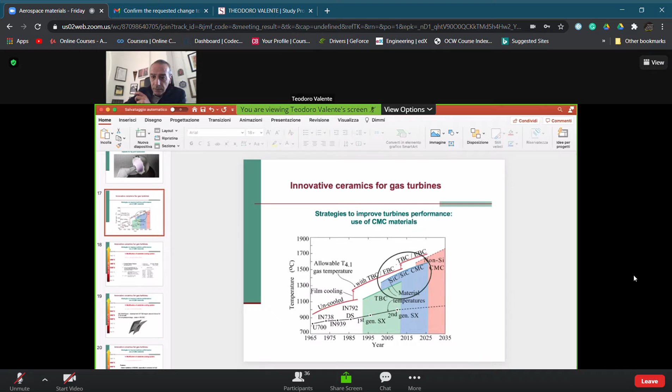Okay, just continuing our discussion related to ceramic materials. This is another field in which ceramic materials, not as bulk materials but as composite materials, can be interesting, and it is the use of this kind of solution in components for gas turbines.

As we will see, this is an area in which there are not yet fully consolidated applications, but it is a developing area, also due to the fact that it is a new area in terms of time. But we can understand the reasons because of these composite materials, especially silicon carbide composite materials, as

I need a pen, one moment. No, oof. Just one moment.

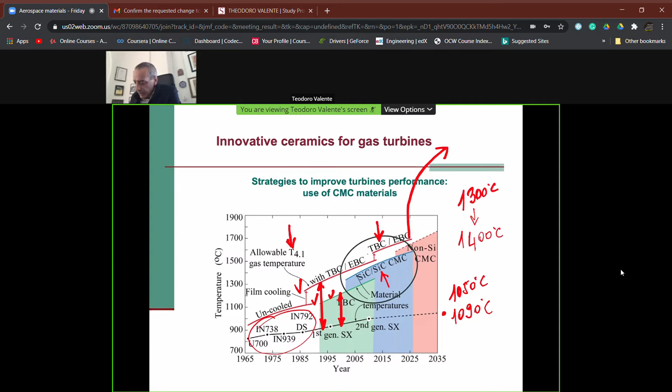But if we move to basic materials like silicon carbide composites, and we also need to put on top, for reasons we will see in a moment, our thermal barrier coatings, you can see here that we can reach a final gas temperature, thus increasing the performance of the engine, of around 1600 Celsius. So with a relevant improvement in terms of fuel efficiency or increased payload, for example, of the aircraft.

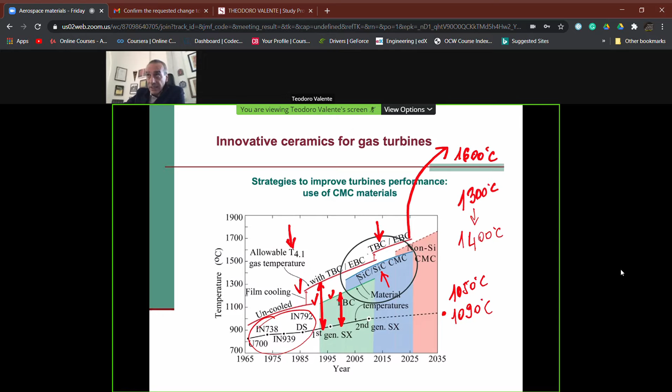This is the reason there is interest in this kind of solutions based on composites, in order to overcome the problem we discussed last time, referred to conventional bulk ceramics, not composite, and related to the low fracture toughness values.

As you can see here, the first relevant patent about this line, which modifies the composition of the blades, so it requires modifying also the substrate coating system, as well as the use of innovative thermal barrier coatings, is quite recent. You see here, less than 10 years. And so the development time for widespread application is at least double this figure. For land-based gas turbines, for example, it is more than 20 years.

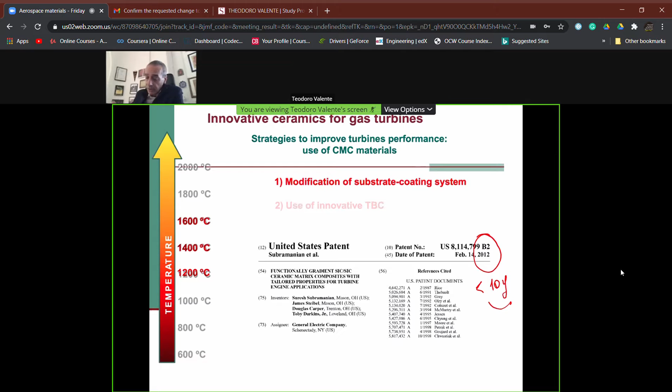Thus, this is a very interesting topic to be monitored, since many relevant industrial companies are working on it, even though, as I said before, we do not yet have widespread application of this potential solution. This is one example, made in the F136 engine from General Electric Rolls-Royce, which is the second choice for this aircraft. You see, that's not a civil aircraft.

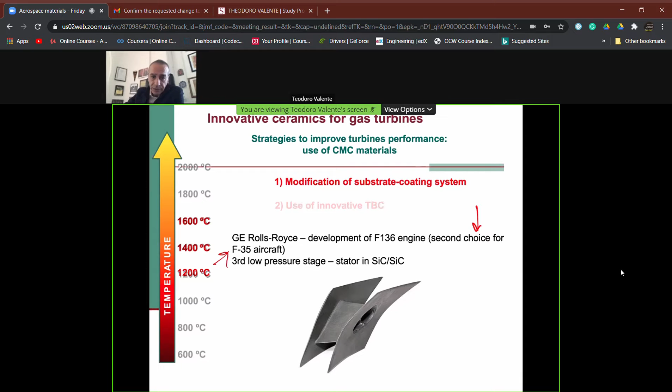And also, we do have examples of silicon carbide composite materials used for the fabrication of stators in the third low pressure stage of the engine itself. So an interesting thing to be monitored in the next years. We still need, even if we go to the solution of silicon carbide ceramic blades, to condition the surface of the blade.

Just to give you an example that we also mentioned, but we can write something now. If we have silicon carbide which is going to react, for example, in a wet environment with oxygen, what can happen is the formation, for example, of silicon oxide, and then carbon oxide or monoxide, that depends, COx. This silicon oxide in this form, with 2 atoms of oxygen, is a solid material, but

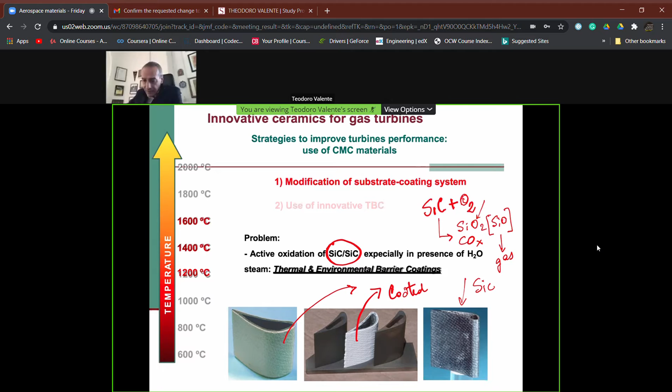This is another topic on which many industries are working, that is the modification of the TBC system. The usual TBC system that we discussed last time, which is the most diffused, is partially stabilized zirconia as a top coat. Then we have an MCrAlY as a bond coat. Then we have, for example, the nickel-based superalloys. So we have the layer of partially stabilized zirconia and the layer, with different thicknesses, of the MCrAlY. Now we are working on the development of multi-layered coatings.

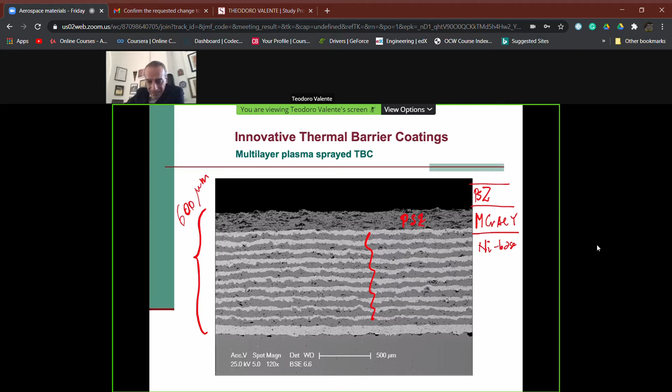This is another topic on which applied, not basic, research and development is going on in these years. Another application of ceramic materials which must be mentioned, and as you see we are discussing very few applications in terms of structural parts, but this is the state of the art today, is the use of a special class of ceramic materials, the so-called UHTC, ultra high temperature ceramics, to fabricate reusable thermal protection systems, TPS. This is the area of re-entry vehicles coming from outside the atmosphere back to the Earth in a cyclic way.

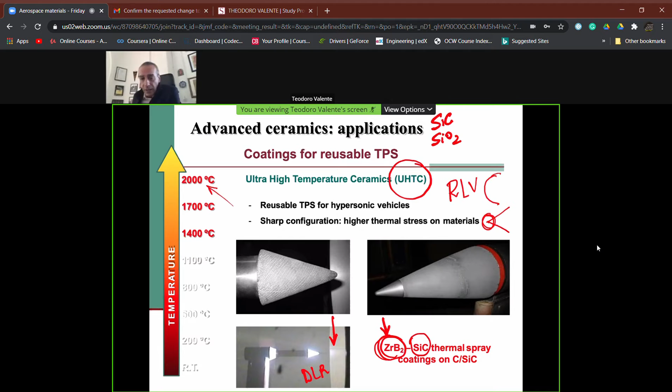And in this case, we have another very targeted niche application of composites, ceramic materials, because you see here we have two phases, the zirconium diboride and the silicon carbide, again in the form of coatings. This is an example of how this coating works.

together with a very relevant thermal shock resistance due to the fact that zirconium diboride, which can be fabricated also by plasma spraying with a tailored porosity, has a very significant thermal conductivity for the ceramic class of materials, and this can reduce stresses related to thermal shock. Also assuring good mechanical properties due to the strengthening mechanism, which can be put in place by using a formulation which recalls the concept of ceramic matrix composites, and then also ablation, which is related with high temperature.

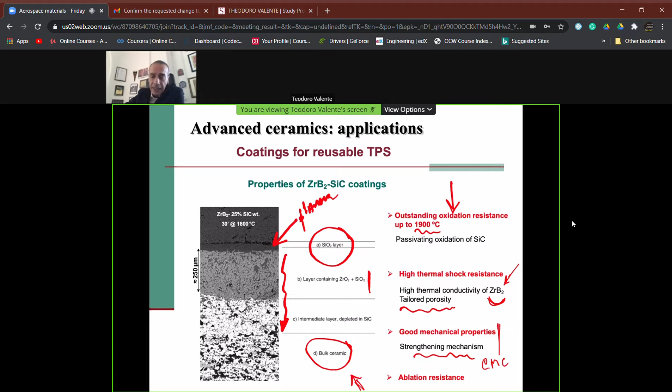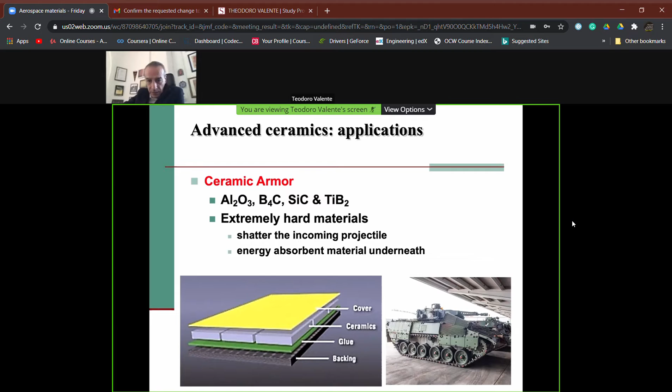We can move also, as another important field not to forget, to the area of thin films, those films which are obtained, for example, with techniques essentially based on physical vapor deposition methods. That is, films in which the thickness of the coating usually does not exceed 5 microns. So this is the reason we call them thin films. And that is the cutting tool. This is a quite established solution.

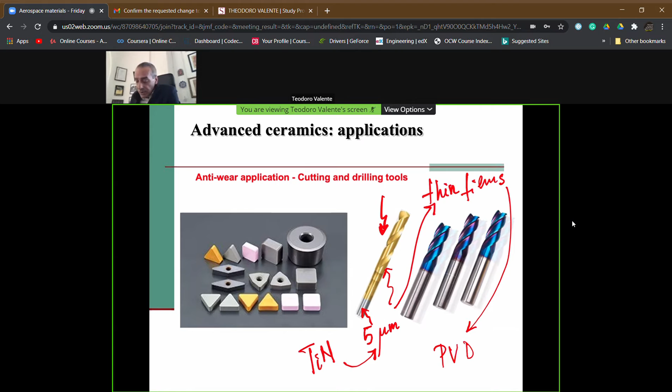thus giving more durability to the object itself during operation when it is going to be used as a cutting or a drilling tool, due to the tribological loads which are applied when used in this way.

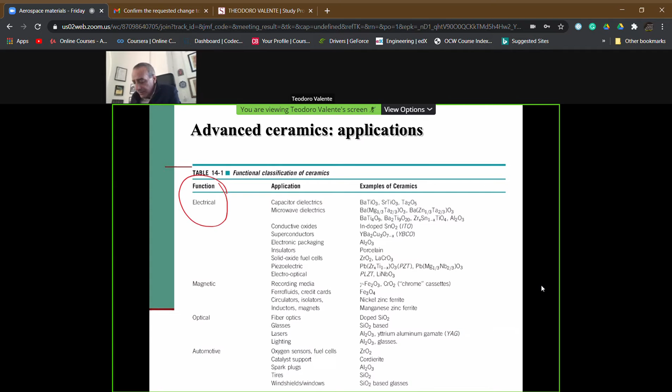Also in this way, many times, not all the times, the functionalization of the surface can be made by coatings, but we have also examples of components made of bulk ceramic when we expect a special function from the component itself.

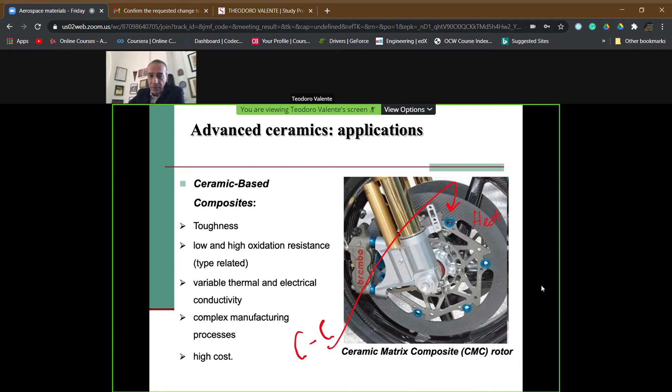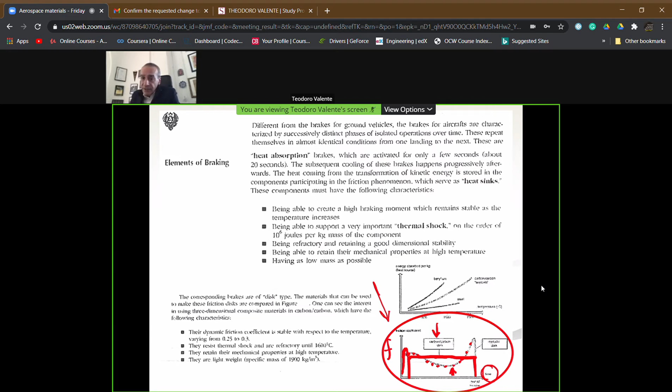It is the first lap which is made, and this is made just to allow the braking system to reach the temperature suitable for a good performance, so that when the Grand Prix starts, the discs are at a good temperature, and can guarantee the efficiency of the braking system itself.

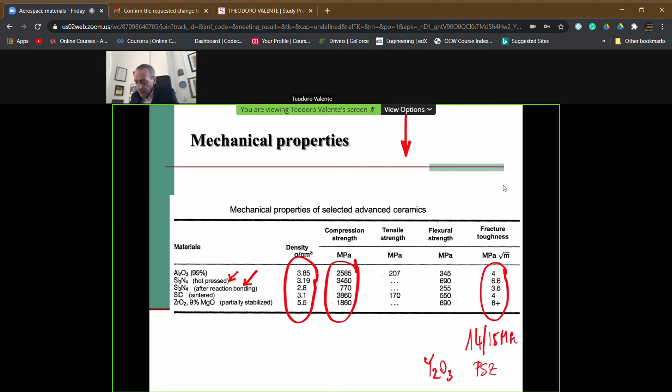We see a very relevant resistance in compression, but a very poor resistance when we have a tensile load. This is one thing that we must remember, and this is related to the low value of the fracture toughness of the materials themselves.

We can also measure the resistance of the ceramic material by using not tensile tests, but bending tests. And this is what is given by the modulus of rupture of the materials, the flexural strength, which gives to us the tensile strength of the materials, but measured by a bending test. And another thing that we see here is that this value, which is again a tensile strength, but measured in bending, is usually higher than that which is measured by a pure tensile stress.

So why all this, and why must we remember this? We must remember this, first of all, for one item. Let me repeat to you again. This class of materials, and now I'm talking about bulk ceramic materials, they do have a very good behavior in compression, but a very poor behavior when subjected to tensile stresses. Second thing is the reason why this is going to happen. The reason is related to the pure value of the K1C.

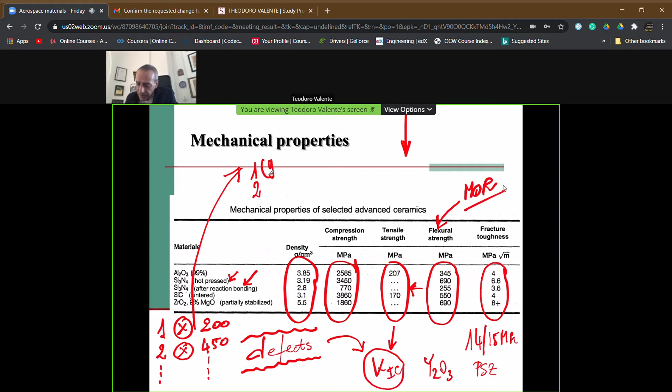And so this requires a consideration, because we cannot use the same design approach that we use with tensile stresses when we use metallic alloys. Because if we make the same consideration for the metallic alloys, I mean, we take one specimen, a second specimen of the same metallic alloy, let's call it Y, just to differentiate. Well, for the first specimen, we could obtain, let me say, 451. For the second specimen, we could obtain 450.5. So the scattering is very, very low in the metallic alloys.

And so we are authorized to make the average of the 5 specimens which are tested according to the standard. And the average, for example, of the tensile strength of these 5 specimens can be used for the design also of larger components. Now, in the case of ceramics, we cannot do it because we cannot make an average. If we have the first value, which is 200, the second value, which is 450, the third value, which is, for example, 70. And that's the key point, we need, for a right design approach with ceramic materials in presence of tensile stresses, a probabilistic approach.

And now let's see again, because some basic elements I discussed with you some days ago, but now we must go a little bit more deep, the approach which can be used, I would correct myself, which must be used when we design with ceramics in presence of tensile stresses due to the very low tolerance to the presence of defects inside the material itself. We need a probabilistic approach.

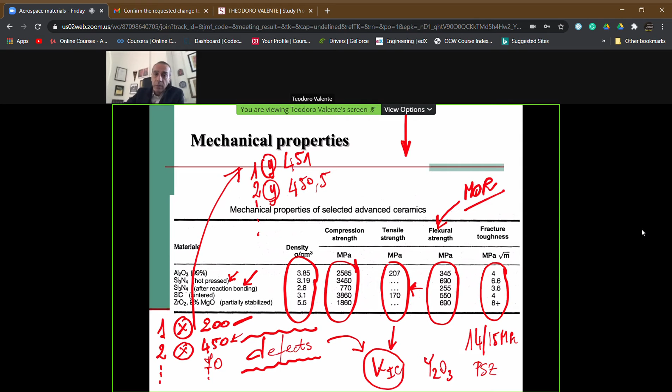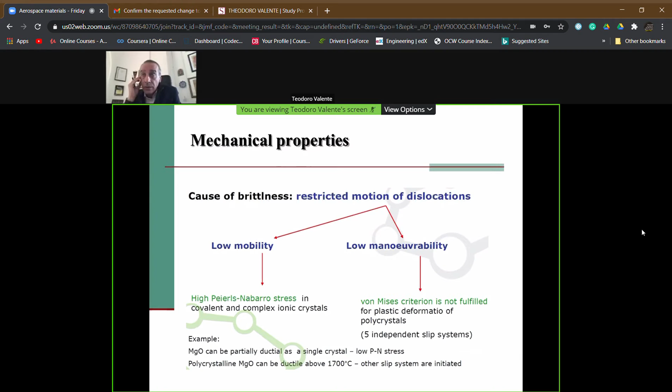And the probabilistic approach is related to the fact, obviously, that these materials are not able to have plastic deformation, apart from some cases of ionic-based ceramics at high temperature, because the dislocations, which are present inside polycrystalline ceramics, cannot move due to the ionic or covalent nature of the bond. This is what is going to result in the use of one distribution, which is the Weibull distribution.

This will be applied when we start with a ceramic bulk in which we can make the hypothesis that the larger pre-existing defects are those able to break the materials when we apply load. So there is no interaction between defects.

This is reasonable when we talk about advanced ceramics, not the refractory or traditional ceramics, because refractory ceramics have porosity values of around 15 to 20%. Instead, for advanced ceramics, we have developed fabrication processes in which porosity, which is a form of defect, is very low, and the real mass density approaches 99.8, even 99.9% of the theoretical density, with very high compaction of the material itself.

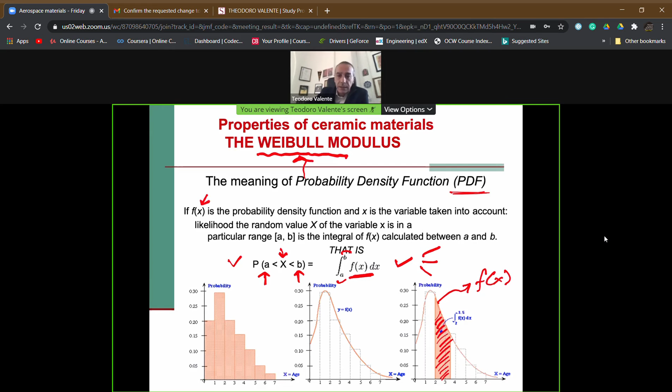We can also say that in order to build the PDF distribution, we need a lot of experimental data. This is because, relying on lab scale experiments, we must transform histograms, which are discrete functions, into a sort of continuous curve. Thus, we need a lot of specimens to be tested, and this is why for statistical interpretation of experimental data, we need a significant number of experimental points.

But this is not a problem, we just must remember that we cannot make any probabilistic elaboration of tensile resistance of ceramics by just making, for example, 3 tests. At least, but they can be higher, we should make for each point at least 30 tests. This means that the characterization phase of this class of materials is more expensive than for metallic materials.

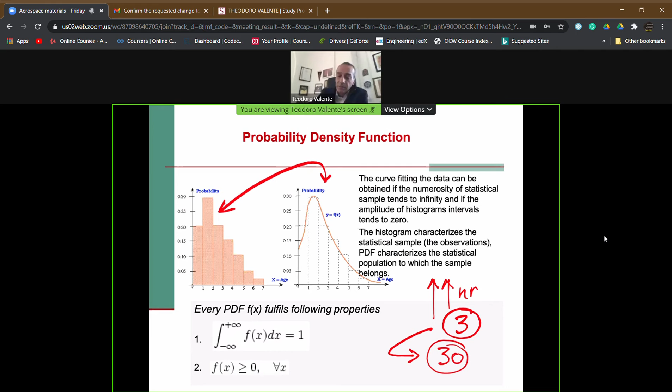Together with the probability density, we can also define the cumulative distribution function, also called CDF instead of PDF. This cumulative distribution function represents an integral of the PDF function, and it is usually used as described here.

If we want to define for our variable x the probability of having a value lower than this x, we have to make the integral of this curve, from minus infinity to the extreme x. This is the meaning of the CDF function.

CDF, or F capital, is always positive because it's always an area which cannot be negative. The total area under the PDF is probability, so it's equal to 1. That means this condition applies: if we make the integral from minus infinity to plus infinity of the density PDF, F capital will be equal to 1, and this other condition is true when we go in the opposite direction.

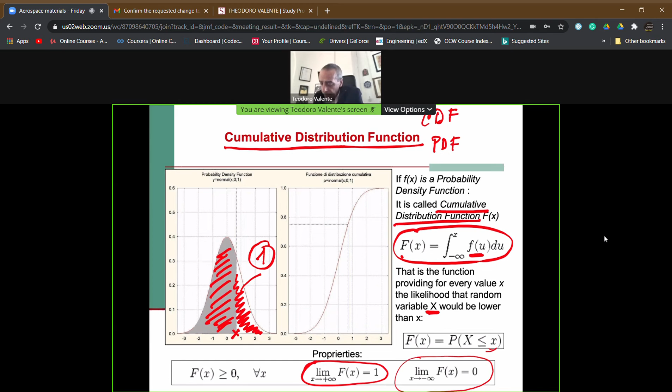So these are the reasons I just discussed with you. What is the Weibull distribution probability? I think we still have some minutes.

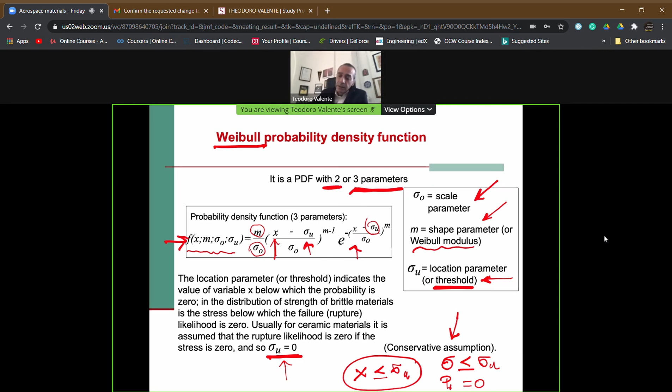This is the Weibull distribution with two parameters, used for our applications. In this formula we no longer have the value of sigma u, because we have set it equal to 0 in a conservative approach.

If we integrate this PDF using the CDF concept we defined before, we get the final expression, which is quite simple here but must be corrected in the next slides, defining the failure probability PF when we apply a tensile stress equal to sigma to our specimen. This failure probability equals this expression, with the scale parameter and the Weibull modulus.

The scale parameter, sigma 0, refers to the stress value below which around 63% of the samples will be broken. This can be calculated from the list of experimental data.

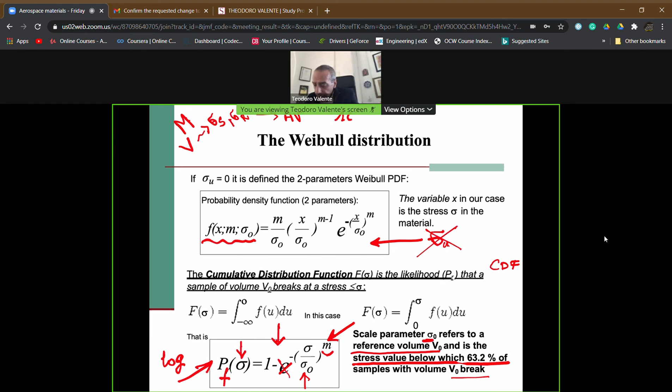The value on which we average, to get the value found in manuals and books, can be used for example for the design of a component having a volume of 1 cubic centimeter, or without any difference, for a component having a volume of 1 cubic meter, just to give an example. So these values are independent from the volume of the component. This is not the case for ceramic materials.

So when we say that we need to modify the mathematical formulation of the Weibull distribution formula, taking into account the volume effect, this means that if we make the same procedure for ceramic materials and test on a lab scale, the values we find are not independent of the volume of the final component. Usually the final components are bigger than the specimens tested on a lab scale, and this increase in volume decreases, even though we use the same materials and fabrication process, the resistance of the engineering component. Decreasing the resistance means that if you increase the volume, you increase the probability of failure for the same external applied load. Again, it is a tensile load.

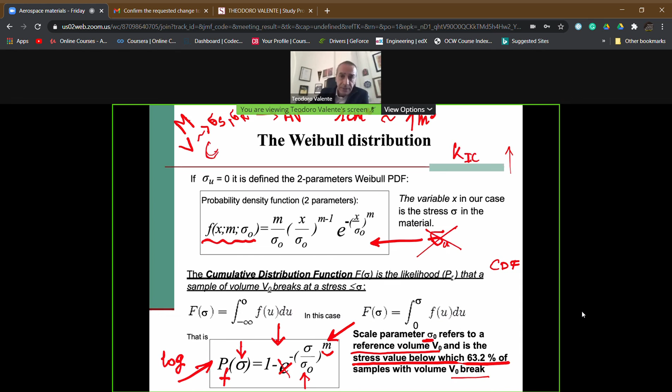Please remember this, then we will see how the modification is made. It's quite simple. Just let me conclude today with this.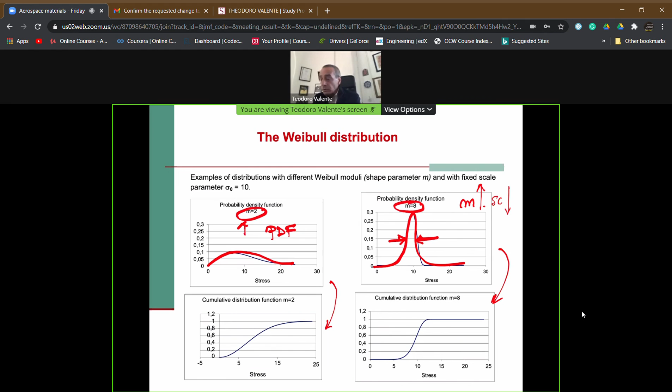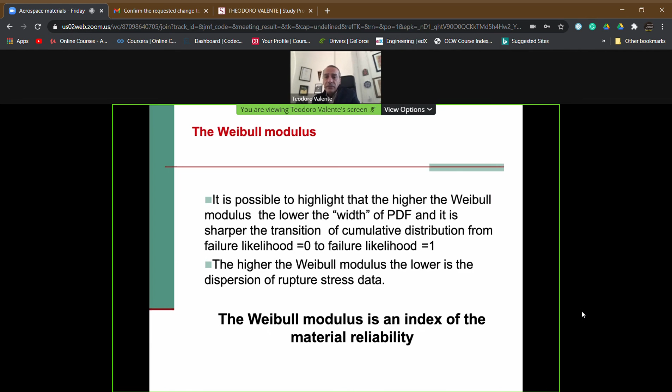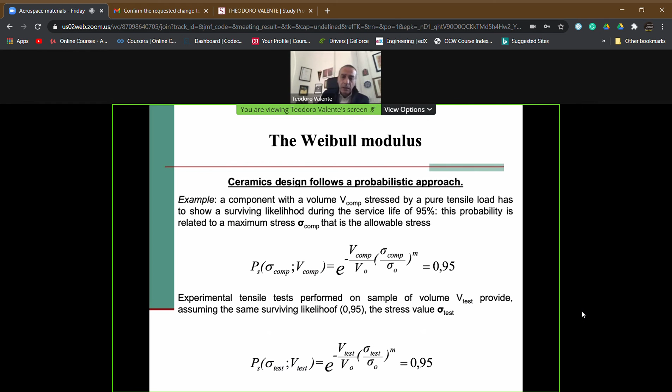Then we can say that the Weibull modulus is an index of material reliability because it affects the scattering of the experimental data. The further step we have to do is consider the real component volume, but this will be the starting point of the lesson next Monday. And for today, we finish our discussion. So if you have questions, please ask me.